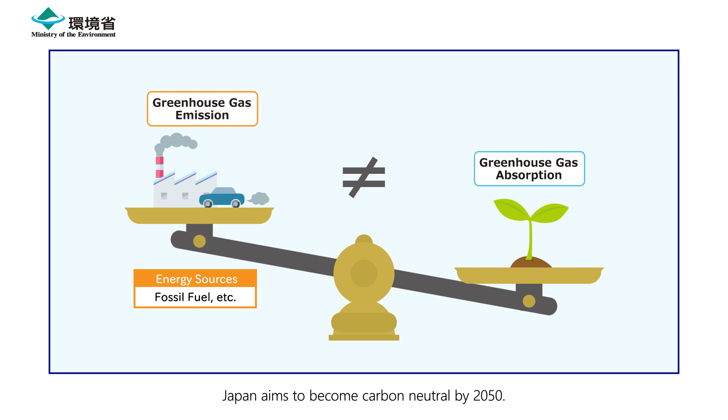Japan aims to become carbon neutral by 2050. To achieve this, it will be necessary to reduce CO2 emissions, especially in the energy sectors where emissions are proportionately high. Thus, there is much hope that hydrogen will play a key role.

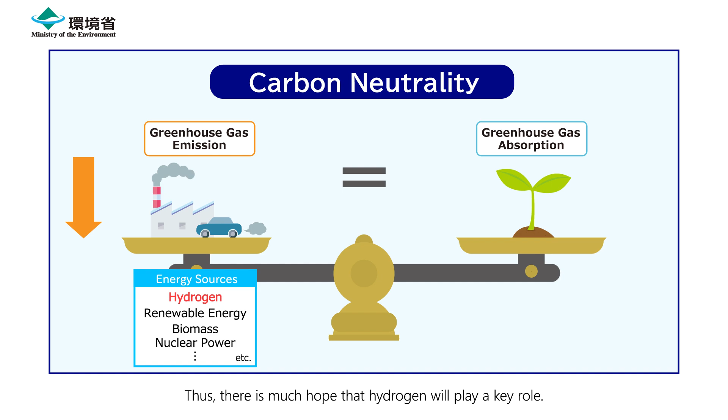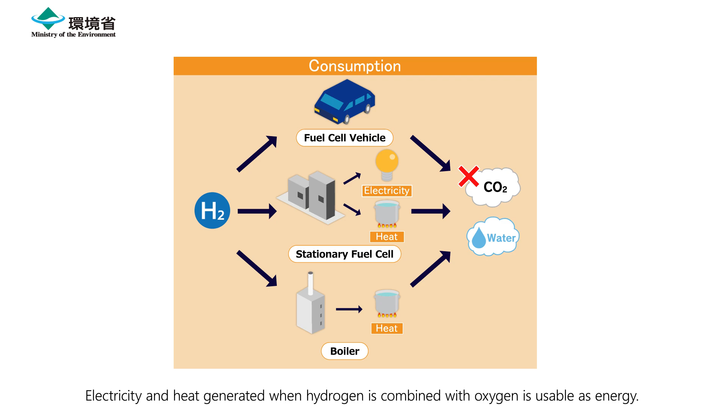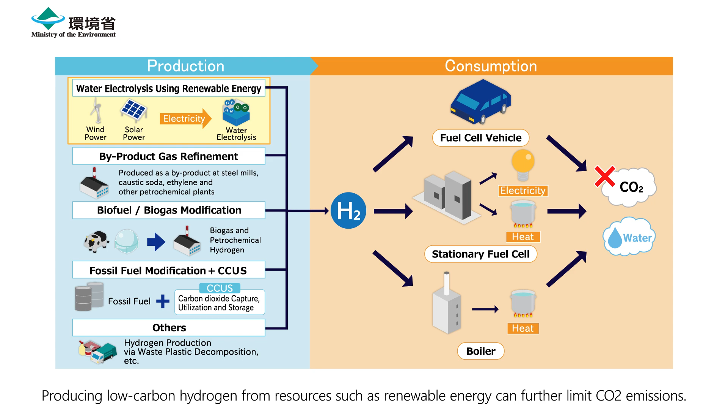Electricity and heat generated when hydrogen is combined with oxygen is usable as energy. This process emits no CO2, just water. Moreover, hydrogen can be produced from a variety of energy sources. Producing low-carbon hydrogen from resources such as renewable energy can further limit CO2 emissions.

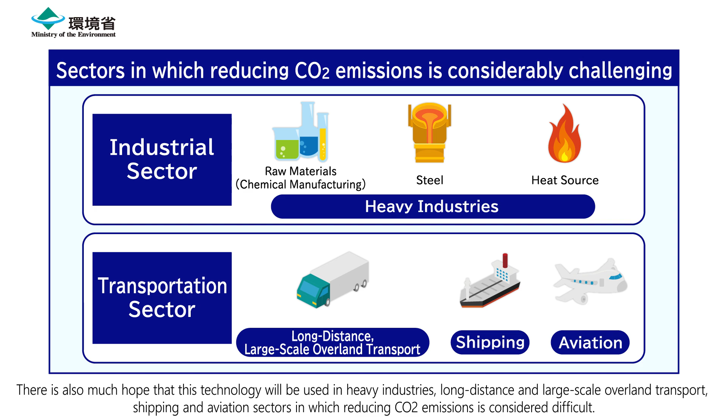There is also much hope that this technology will be used in heavy industries, long-distance and large-scale overland transport, shipping, and aviation sectors in which reducing CO2 emissions is considered difficult.

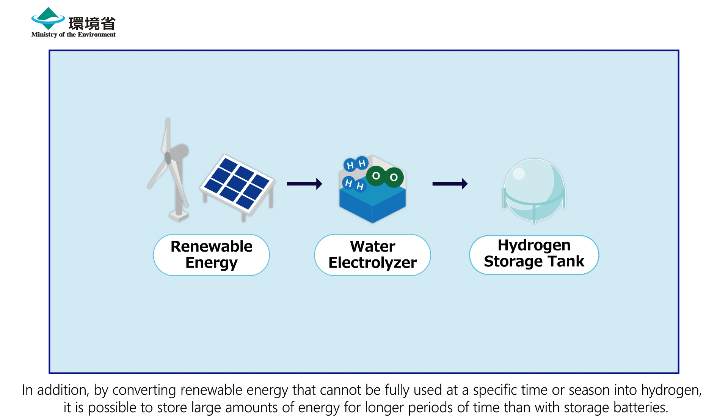In addition, by converting renewable energy that cannot be fully used at a specific time or season into hydrogen, it is possible to store large amounts of energy for longer periods of time than with storage batteries. The hydrogen stored could be extracted and utilized as electricity or heat whenever it is needed.

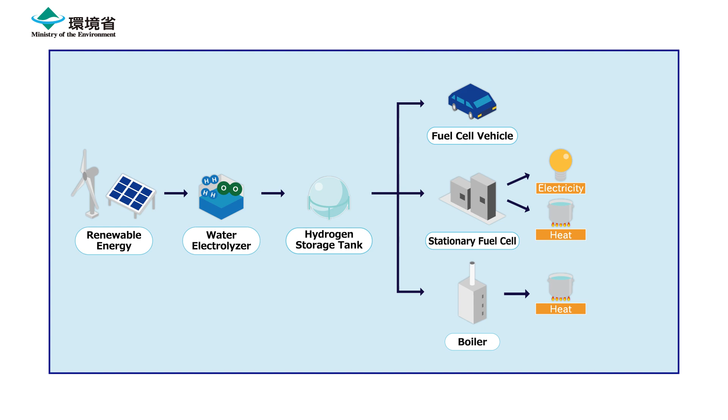If hydrogen is stored in advance, stationary fuel cells can generate electricity and heat even during a power outage caused by a natural disaster. Since hydrogen is transportable, it means energy can be delivered flexibly.

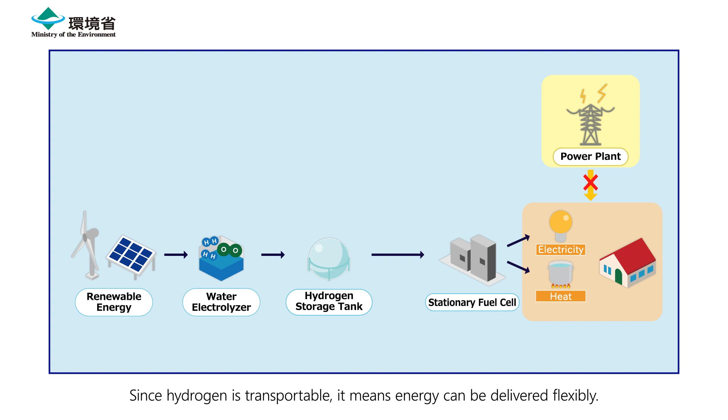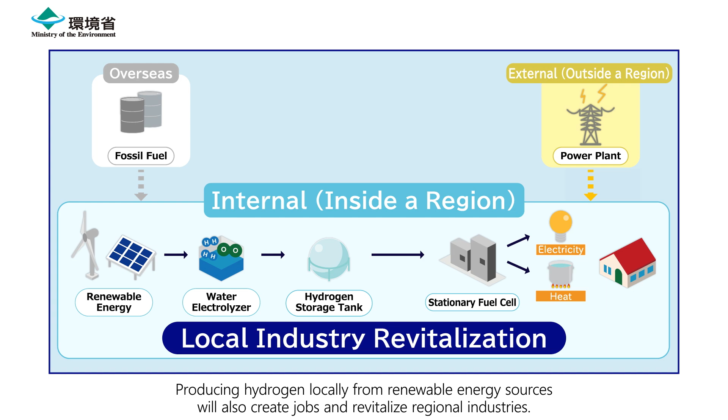Producing hydrogen locally from renewable energy sources will also create jobs and revitalize regional industries. In order to advance decarbonization with hydrogen, we need to consider creating a supply chain, that is, methods of producing, storing, transporting, and consuming hydrogen.

The first step in the supply chain is hydrogen production. Hydrogen can be produced from a variety of resources and methods, including electrolysis, which uses electricity to split water into hydrogen and oxygen.

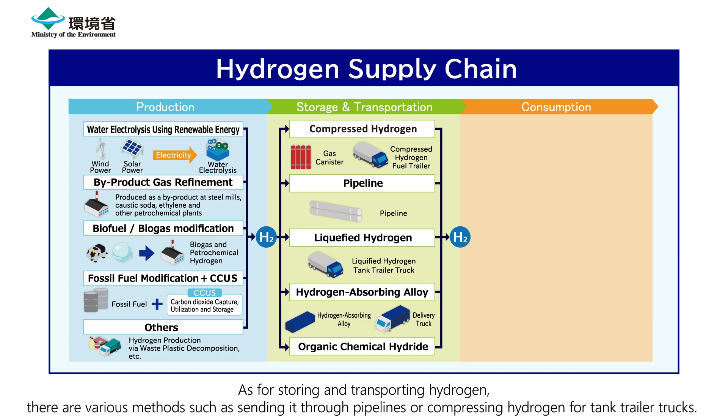As for storing and transporting hydrogen, there are various methods, such as sending it through pipelines or compressing hydrogen for tank trailer trucks. The most appropriate method depends on distance and volume.

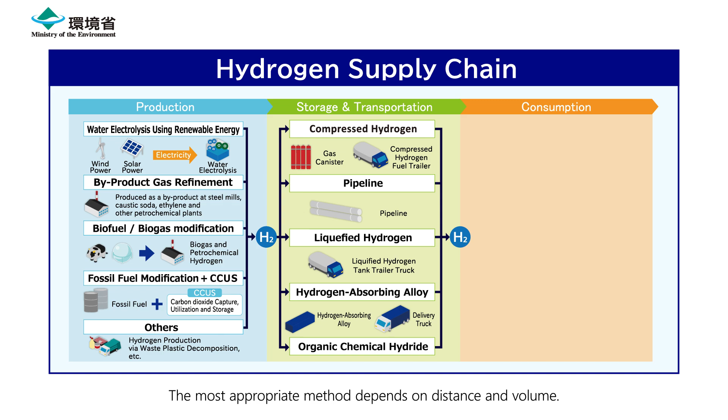Hydrogen transported in this way can be used in a variety of ways, such as fuel cell vehicles, stationary fuel cells that supply electricity and heat, hydrogen boilers, and raw material for chemical products.

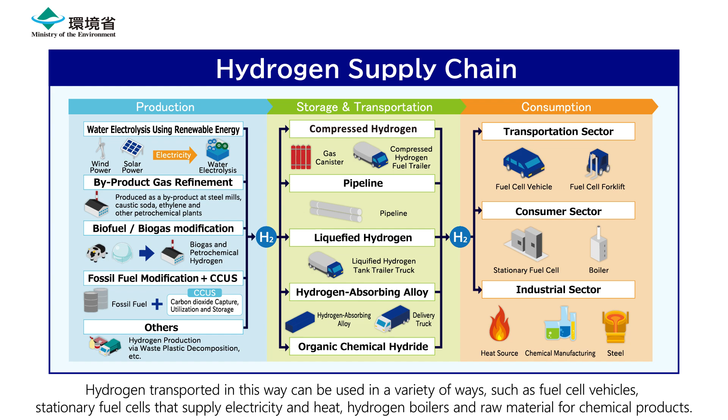The Ministry of the Environment is conducting demonstration projects and subsidizing programs to promote hydrogen consumption in regional areas. Let's look into them.

Of the 13 demonstration projects the Ministry of the Environment has carried out to date, 4 of them are currently being undertaken.

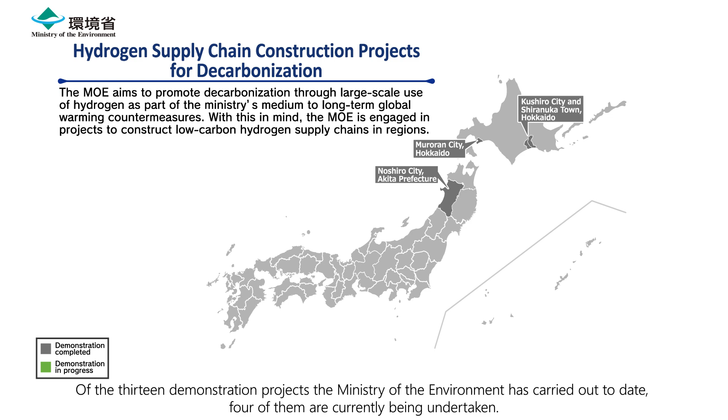The completed projects produced hydrogen from various local resources, including renewable energy and biogas derived from livestock manure and plastic wastes.

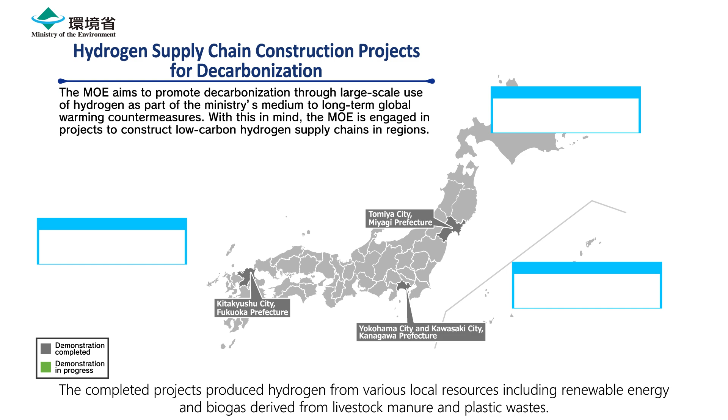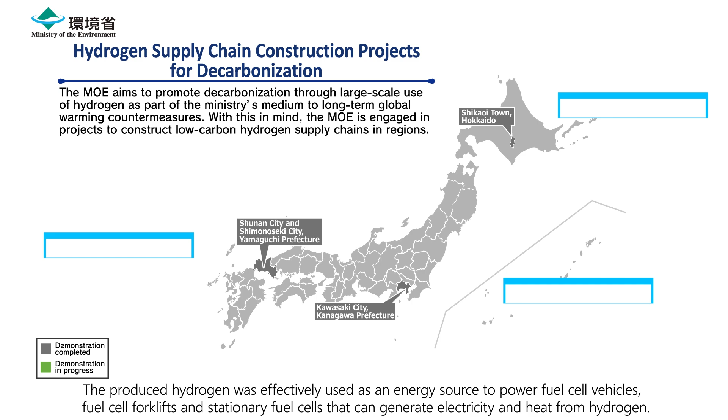The produced hydrogen was effectively used as an energy source to power fuel cell vehicles, fuel cell forklifts, and stationary fuel cells that can generate electricity and heat from hydrogen. The demonstration projects have proven that the entire process of producing, transporting, and consuming hydrogen can be done locally.

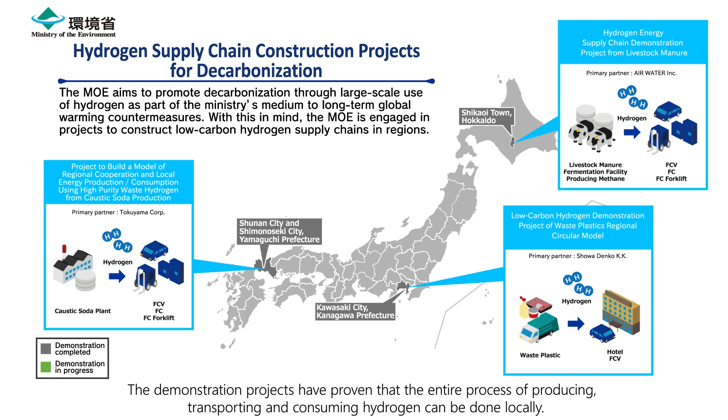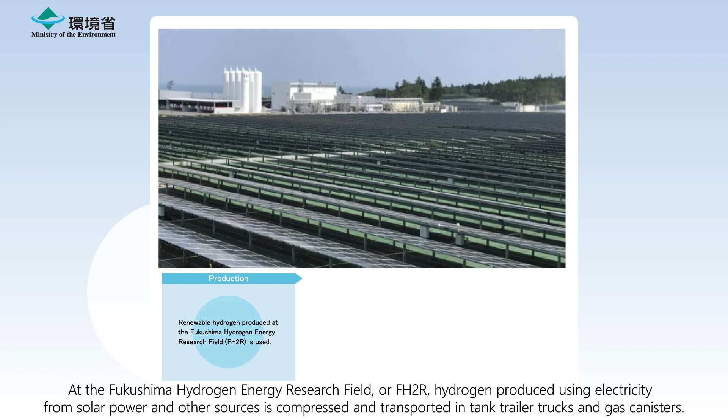The first of the demonstration projects currently being undertaken is in Namie, a town in Fukushima Prefecture in northeastern Japan. At the Fukushima Hydrogen Energy Research Field, or FH2R, hydrogen produced using electricity from solar power and other sources is compressed,

and transported in tank trailer trucks and gas canisters. By introducing a system that monitors the remaining hydrogen levels at end users and the status of delivery vehicles, the project strives to transport hydrogen efficiently to multiple destinations.

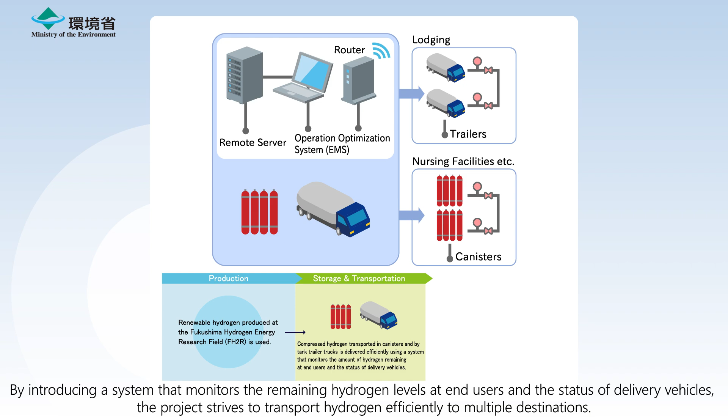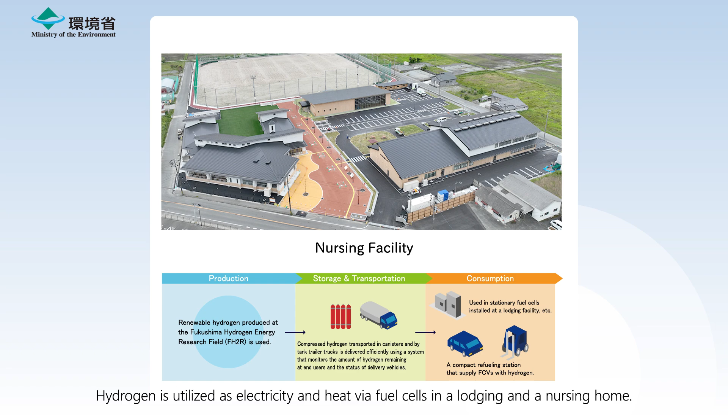Hydrogen is utilized as electricity and heat via fuel cells in lodgings and nursing homes. In addition, a compact refueling hydrogen station can supply hydrogen to fuel cell vehicles. These vehicles can also be used as power supply units in the event of an emergency.

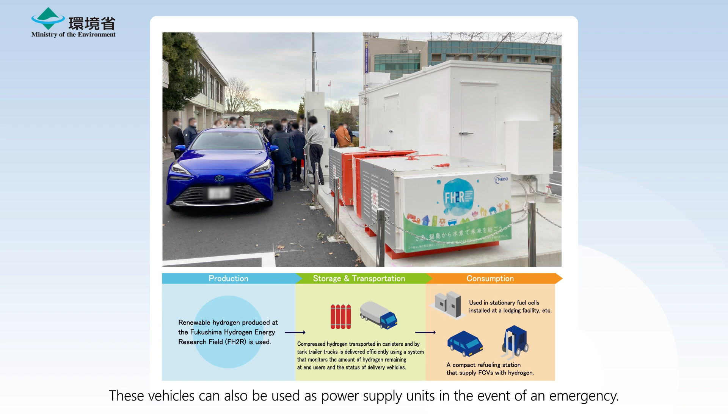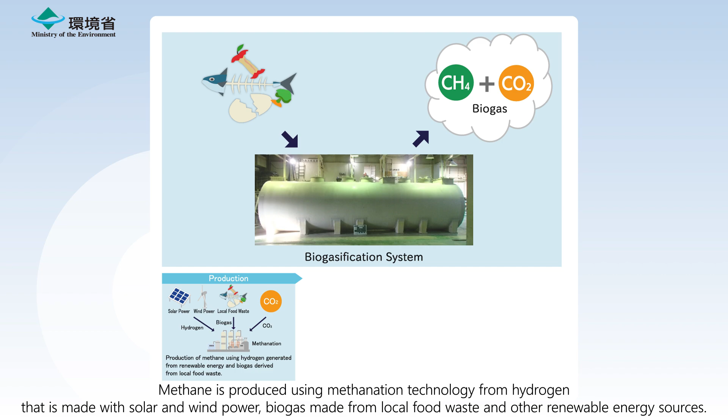The second ongoing demonstration project is taking place in the city of Osaka. Methane is produced using methanation technology from hydrogen that is made with solar and wind power, biogas made from local food waste, and other renewable energy sources. Methanation is a technology that, from hydrogen and CO2, produces methane, the main component found in natural gas.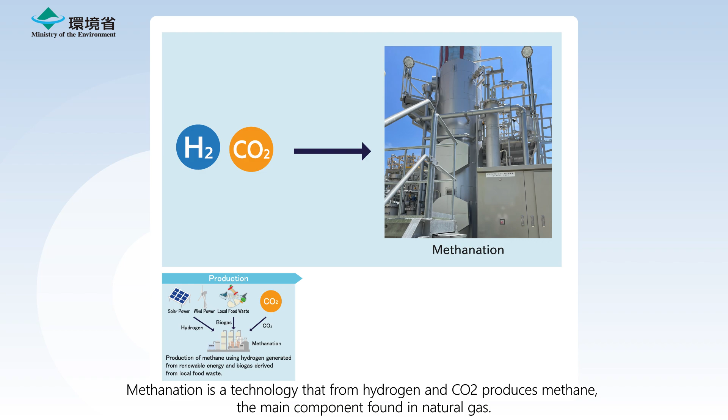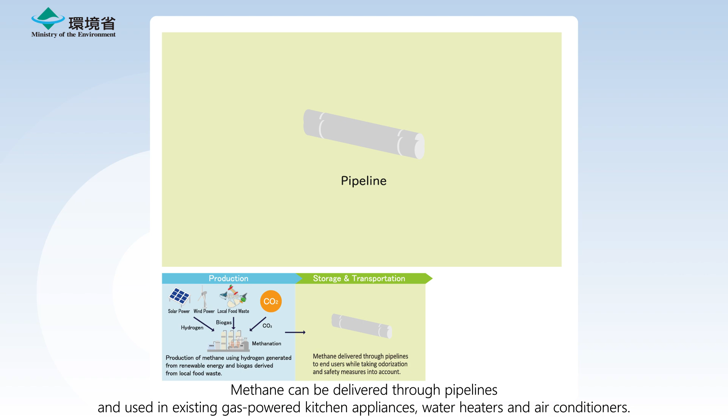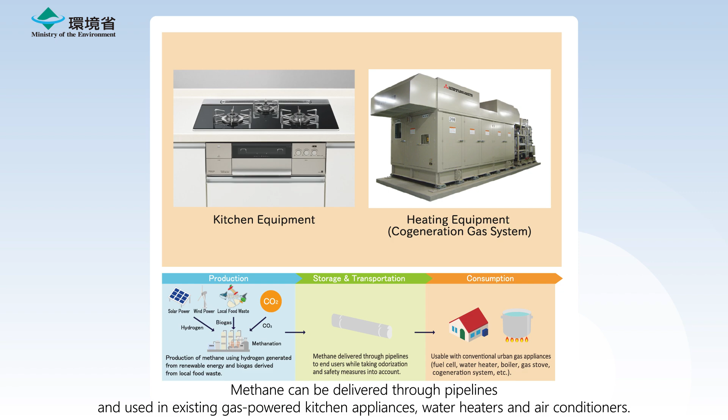This methane can be supplied directly in the existing gas infrastructure and consumed by end users. Methane can be delivered through pipelines and used in existing gas-powered kitchen appliances, water heaters, and air conditioners. This method will be demonstrated at the Osaka Kansai Japan Expo in 2025.

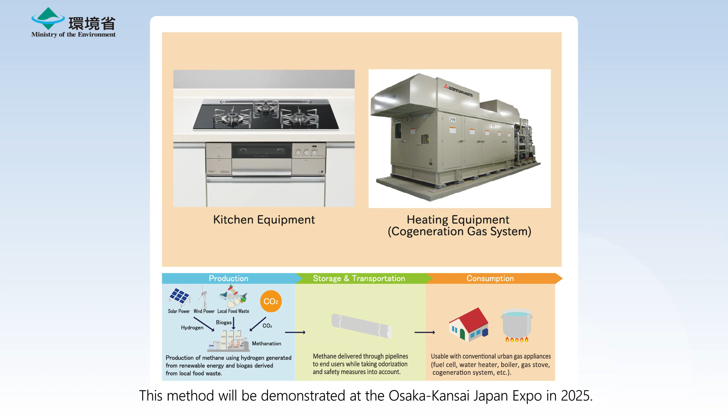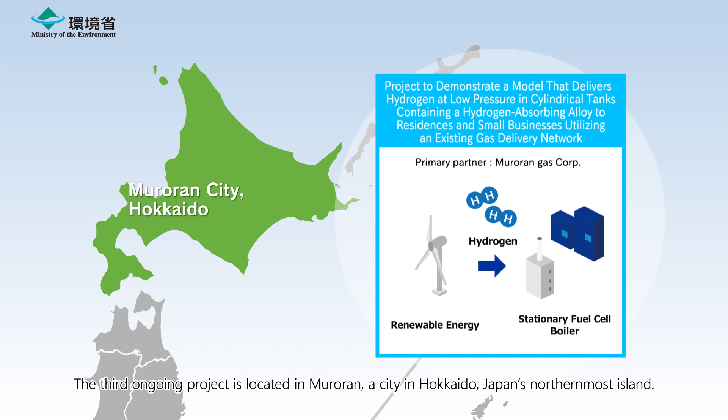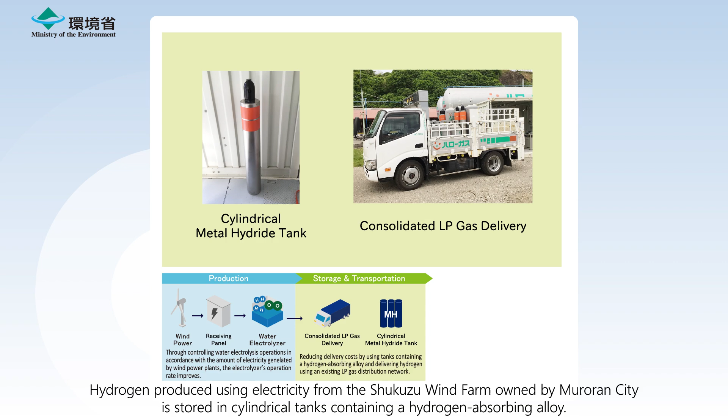The third ongoing project is located in Muroran, a city in Hokkaido, Japan's northernmost island. Hydrogen produced using electricity from the Shukuzu wind farm owned by Muroran City is stored in cylindrical tanks containing a hydrogen-absorbing alloy. The tanks are then integrated into existing gas distribution networks and delivered to end users within the city.

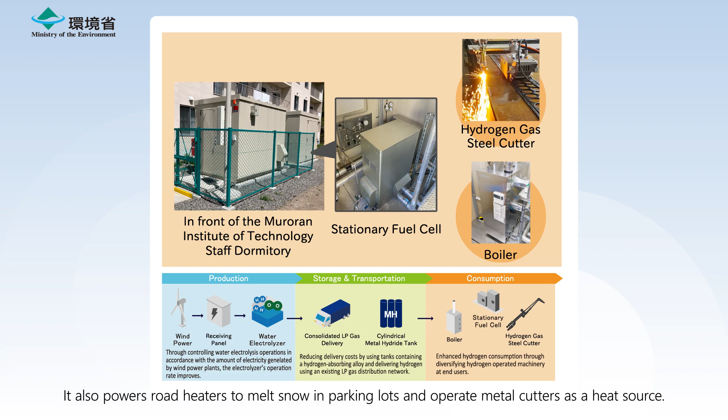Hydrogen is supplied to small shops and lodging facilities, where it is used as electricity and heat. It also powers road heaters to melt snow in parking lots and operate metal cutters as a heat source. The project is also working on ways to increase hydrogen usage and demand.

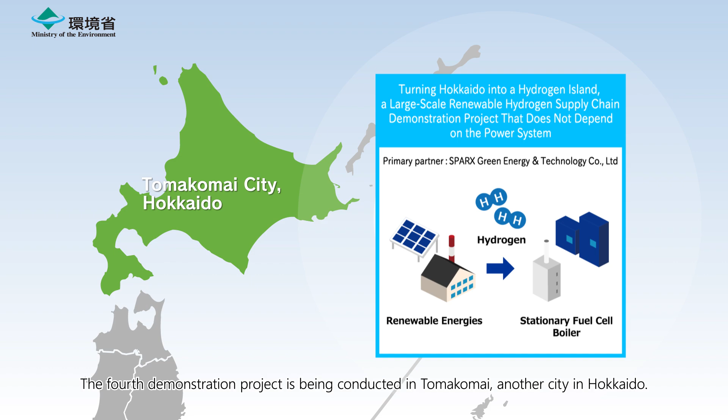The fourth demonstration project is being conducted in Tomakomai, another city in Hokkaido. A stable supply of hydrogen is produced by combining waste-generated electricity and solar power.

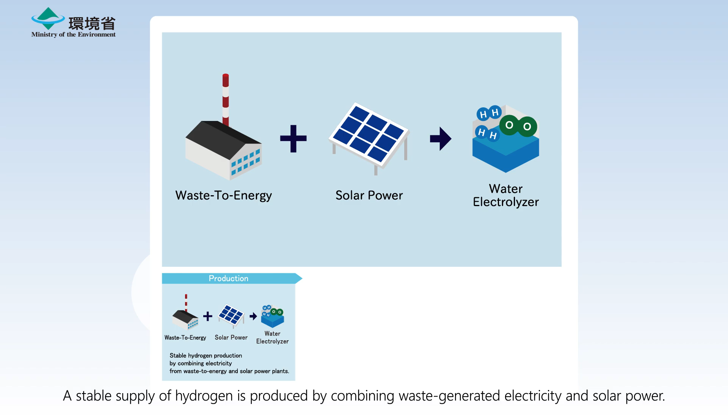The hydrogen is compressed and transported in high-pressure tank trailer trucks, which are also used to store the hydrogen to reduce costs.

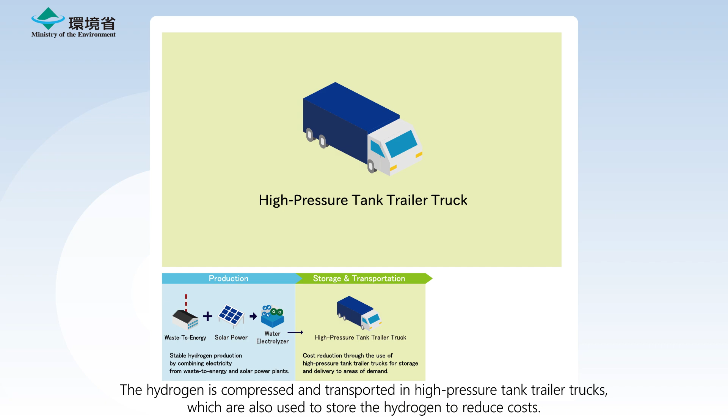The hydrogen is used to heat buildings and make hot water to reduce the consumption of kerosene and other fossil fuels, which are widely used in such cold climates.

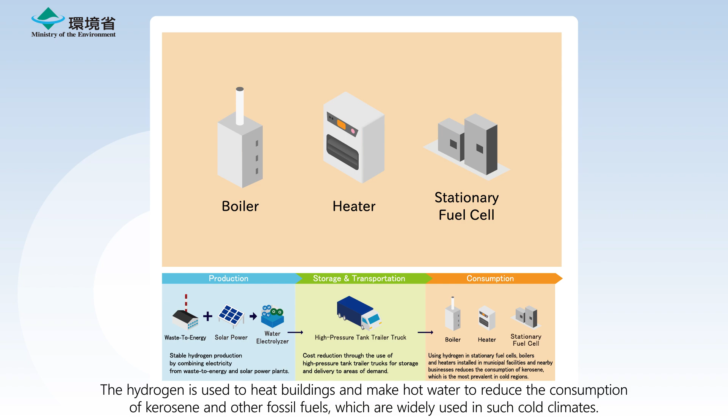Let's now take a look at 3 subsidized projects. The Ministry of the Environment has been subsidizing projects to implement assistance in a variety of facilities that produce, store, transport, and consume hydrogen. Let's take a look at 3 of them.

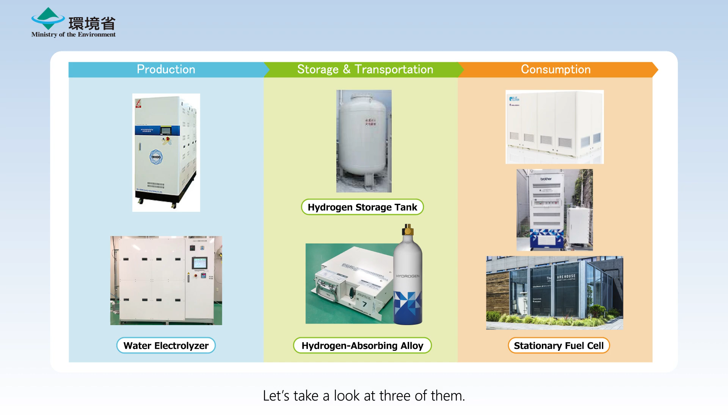The first project subsidizes an electronics manufacturer to install a series of machinery that produce hydrogen from solar power generated by the equipment on the company's building and store it for use as electricity and heat.

The hydrogen produced using surplus solar power is safely stored in the building with a hydrogen-absorbing alloy and then used to generate electricity and heat.

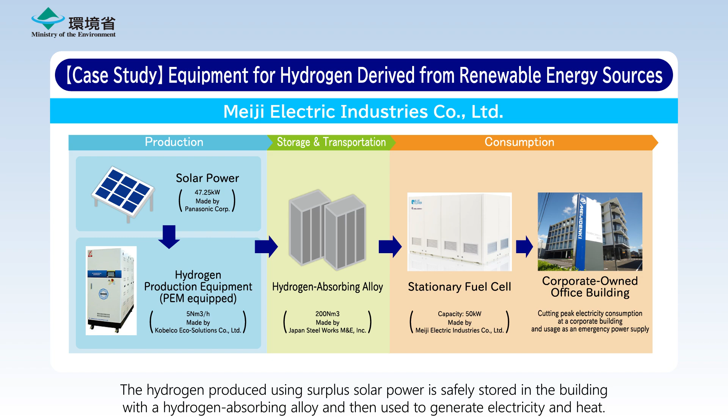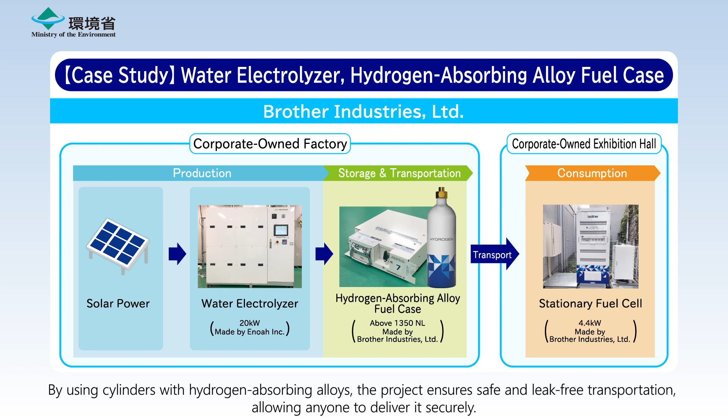The second project subsidizes the installation of equipment at a factory that produces hydrogen from solar power, stores it in hydrogen-absorbing alloys, and transports it. By using cylinders with hydrogen-absorbing alloys, the project ensures safe and leak-free transportation, allowing anyone to deliver it securely.

A third project subsidizes a hotel to install equipment that utilizes hydrogen. The hotel operates on stationary fuel cells powered by hydrogen-produced electricity.

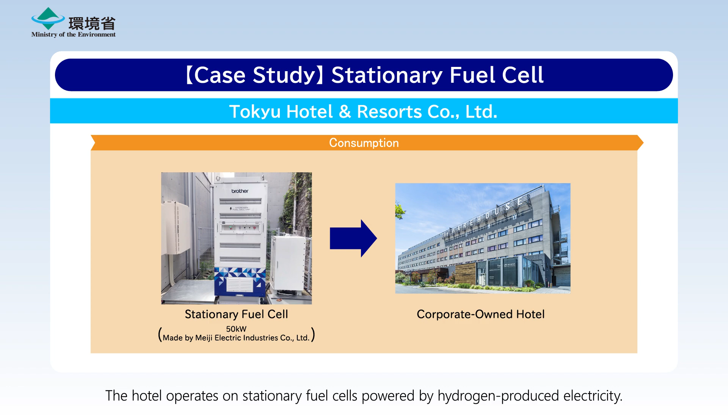Through these demonstration and subsidized projects, Japan's Ministry of the Environment aims to promote the utilization of hydrogen and realize a hydrogen-based society.